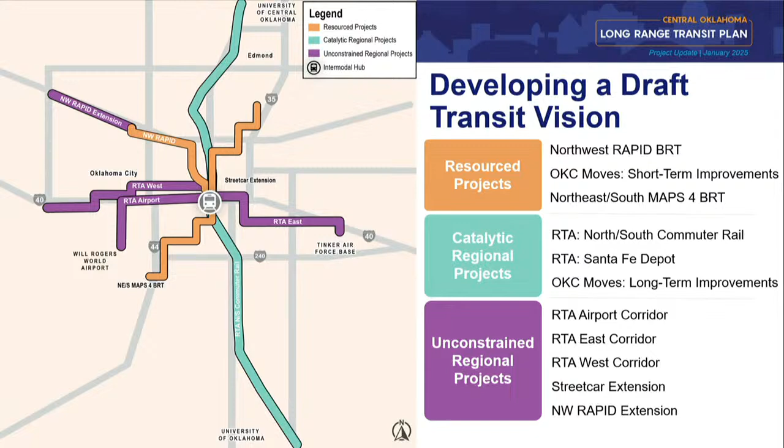Last but not least is what we're calling the unconstrained regional projects. These are projects more for the 30-year horizon: the RTA Airport Corridor, the RTA East Corridor and West Corridor, as well as potential streetcar extensions and even a Northwest Rapid extension. These are all projects that make up the vision of this plan.

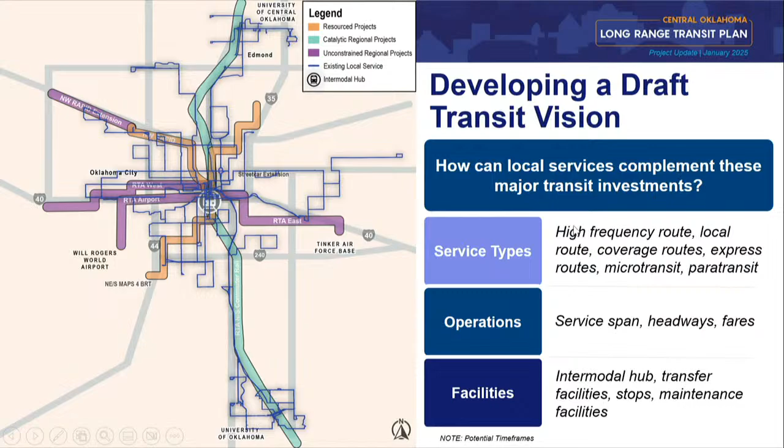Alongside that, local service will be a great opportunity to realign with these regional high-capacity corridors. We'll be looking at service type, operations, and what facilities could look like as part of this plan to recognize those regional connections that the vision corridors represent. So that'll be a significant focus as well on this long-range plan.

So just want to talk quickly about schedule. We started this planning process in August of last year. We've had a lot of stakeholder engagement with all the different communities and operators in the area. We'll be wrapping up the assess phase at the end of this month and rolling into the evaluate phase of the project. Throughout the project, we've had a lot of coordination with the RTA as well as the other operators I mentioned previously.

With all the great work being done, it's important to be coordinated throughout this process. Last but not least, the project website that'll be live later today is connectcentralok.com, and we'll have information there about the virtual town hall on January 30th from 11:30 to 1.

So with that, love to open up to any questions. Luke, thank you. Any questions? No? Okay. Appreciate the very comprehensive, high-level summary, but the comprehensive look at how you're approaching all of these projects. So thank you very much. Great. Appreciate it. Thank you.

Okay, moving on to item 2D, recommend approval of final plans and specifications to be advertised for bid for the MAPS 4 bike lanes Phase 1A, Northwest 16th and Northwest 19th Streets between Overholser Trail and Indiana. This is another piece of our bike lanes projects. Josh Malwick from Consor Engineering is here to go through what's included in this set of plans.

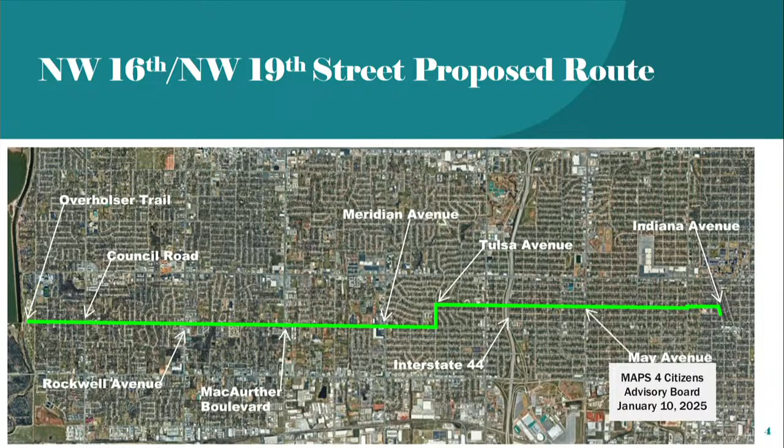This is just an overview of the proposed route. You can see where it starts there on the west end at Overholser. It makes a jog from 16th to 19th at Tulsa, and then it ends at Indiana. There's a little jog down Indiana that connects to the Watch For Me and the sales tax projects as well.

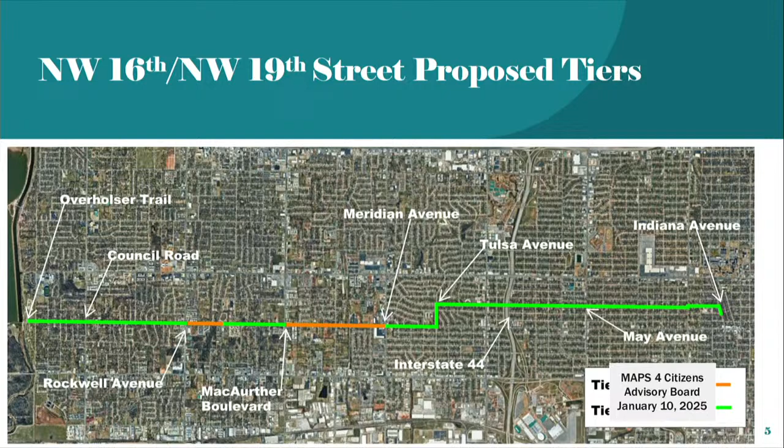We did have to make a little bit of a change to the tiers. This was proposed along Northwest 16th to be a Tier 3 facility. However, because of the available width, we had to make some adjustments, so we were able to throw some Tier 1 in there. I actually put some protected bike lanes using the armadillos—I'll show you what those are in a moment. So we got about a quarter of a mile at Rockwell, and then the full mile between MacArthur and Meridian, where we were able to get to Tier 1.

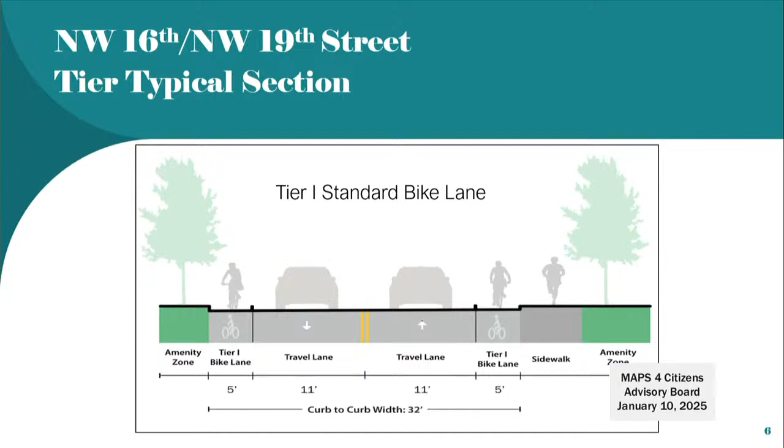Just as a reminder, we do need 32 feet for the Tier 1 standard bike lanes. That way we're able to get 11-foot driving lanes, which is about the smallest we can go with the driving lane, and then get the 5-foot bike lanes in there. The Tier 3 requires a 22-foot wide roadway, and then we center the Sharrow pavement marking along the best alignment—because we need the best alignment for where vehicles are driving along 19th Street, where there's a center median that divides traffic. We'll be putting that more towards the median side, centering it there because it's 18 feet wide versus just 11 feet wide.

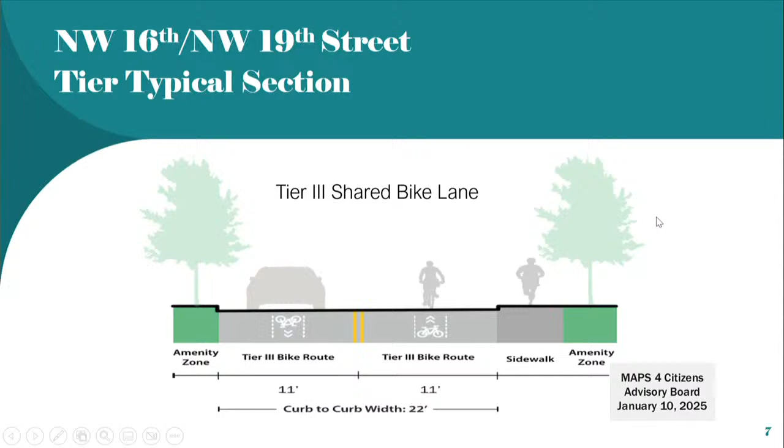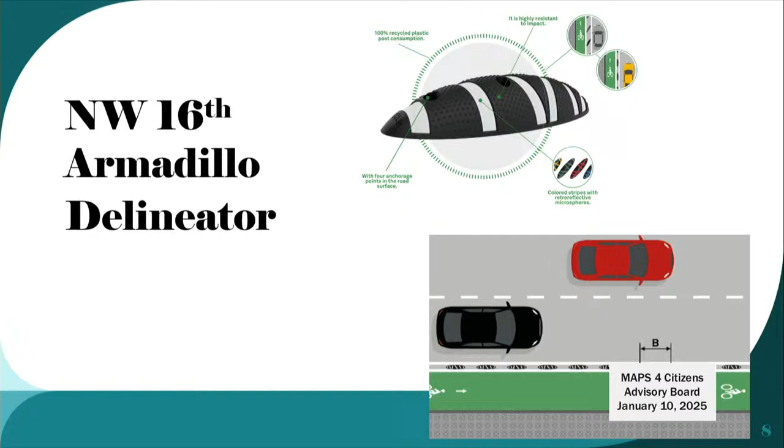So this is the armadillo that we'll be using. It's mounted to the pavement. You can see in that bottom picture, this is more along the lines of what we'll be installing because it will just be a single line—it won't actually have a buffer there. When we have this application in a buffer, we're able to actually put it in on a 45-degree skew along the buffer.

So the 16th and 19th Street improvements, we were able to add 377 sharrows, roughly a mile and a half of Tier 1 bike lanes. We will be doing pavement repairs along the routes to make sure that what we're putting down on the pavement is adequate and that the route surface is as best as possible for cyclists traveling along it.

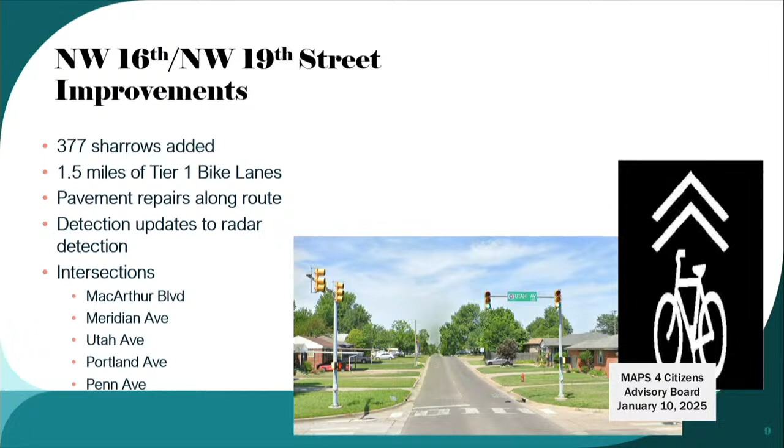We are signalizing the May Avenue and 19th Street intersection. This was approved by Traffic Commission, I think in 2021. They wanted to actually add left turn lanes, but because of the available space and the amount of right-of-way and homes that we would end up having to take to put left turn lanes in, we're just going to add signals to this intersection.

We're also updating the pedestrian infrastructure, so all current ramps will meet ADA. We're going to add the crossing there at the median on the east side, which is the bottom side of the image there. All new push buttons and pedestrian signal equipment as well.

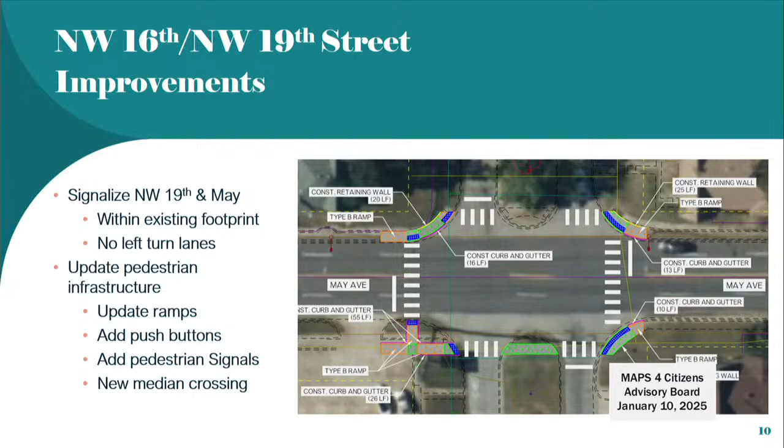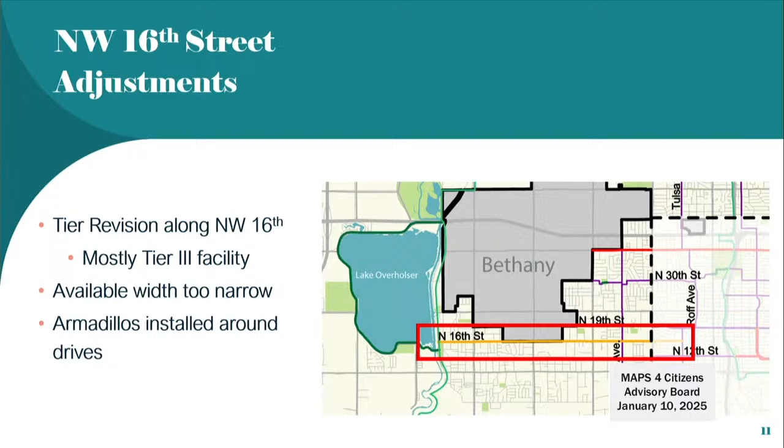Like I had said, we did have to make some adjustments to the tiers as presented in the current bike walk. It does show to be a Tier 2, but because of that space, we had to change it to Tier 3. The available width was just too narrow, but we are going to be able to install those armadillos at the bike lanes to provide a little bit more visibility and protection.

So the schedule will be to go to council next week, and then we'll immediately turn around and go to bid, hopefully awarding it in March, and then wrapping up construction likely in late fall.

As far as budget goes, we had $3.4 million for the project with the construction cost estimate just under 2.4, so we'll have a surplus budget of a little over $1 million.

The public information website's been quite successful. As of yesterday, we had 724 hits to the site with about 255 downloads of the documents that we put on the site to provide information as to what the bike lanes, what each one of these projects is.

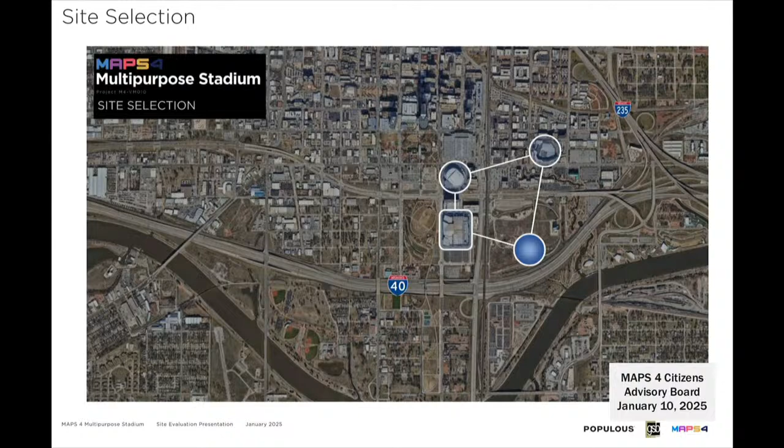This is a view of the parcel outlined here, the actual 9 acres that were donated. As you can see, there's a bit of orientation to these 9 acres as part of the development and master planning, with the goal to hopefully have a stadium with some views facing certain directions towards the city.

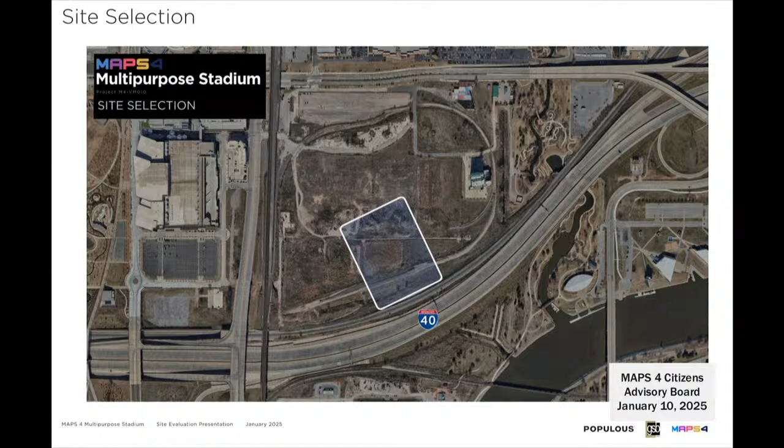Here's a very conceptual master plan thought of what could be around here. None of this is set in stone or developed any further than what you see today, but it's looking at how this overall district could be laid out. To be clear, our portion of work is just the stadium - everything else around it is private development and part of a larger master plan approach. But this is where we're looking to fit it.

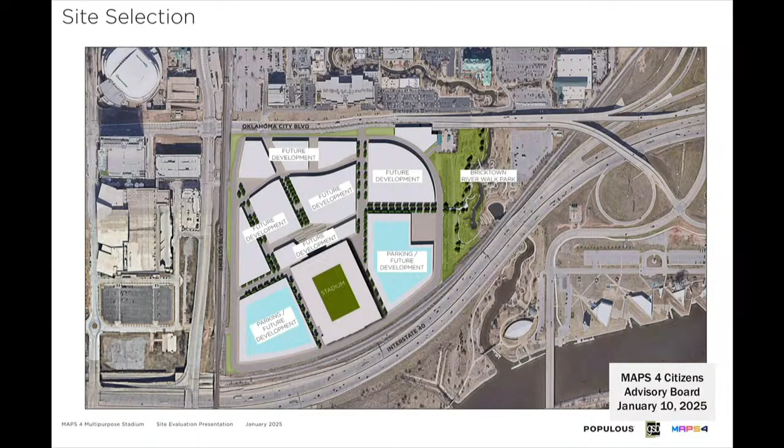As we zoomed in on this boundary line, this kind of rectangular shape, the goal was to test fit this size with current MLS stadium sizes and requirements. There's plenty of space there to do that, which is really the goal of this task, and we can confirm that we can fit it. Some of the other amenities people have been asking about, parking and other facilities around it, that's yet to be determined. We'll come back with that information as we get farther into the design phase, but right now we just needed to test that the stadium can sit here.

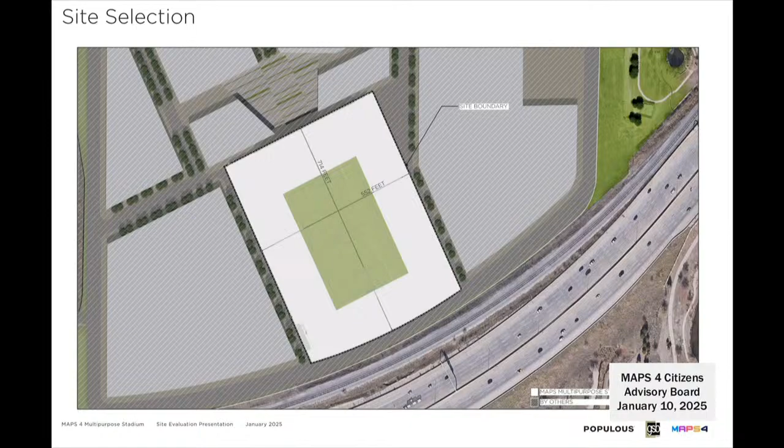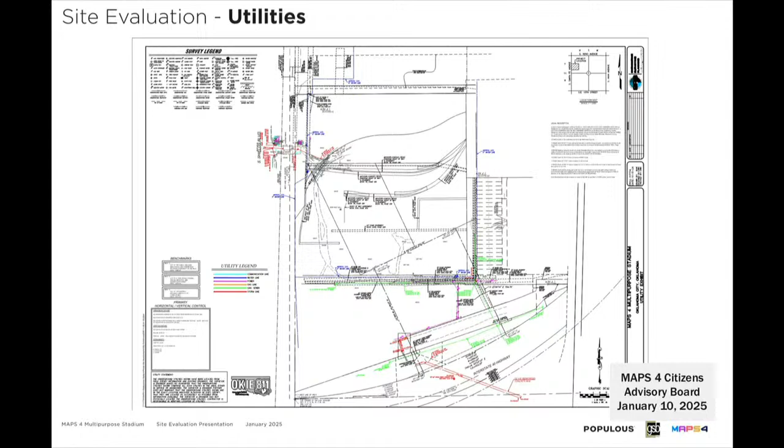Part of the site evaluation process was to look at those existing 9 acres and understand what's within that space, so we had a full site survey done. As many of you know, that's the old co-op land area that was removed and demolished, so it's mostly just a big open field area right now. There are a few different landowners, but as far as this parcel goes, there's not a lot going on in that space today. There's very little change in elevation and topography, which is good - it's mostly a flat site, so there won't be a lot of earth demolition needed for the new stadium. There are also very few utilities on this site today.

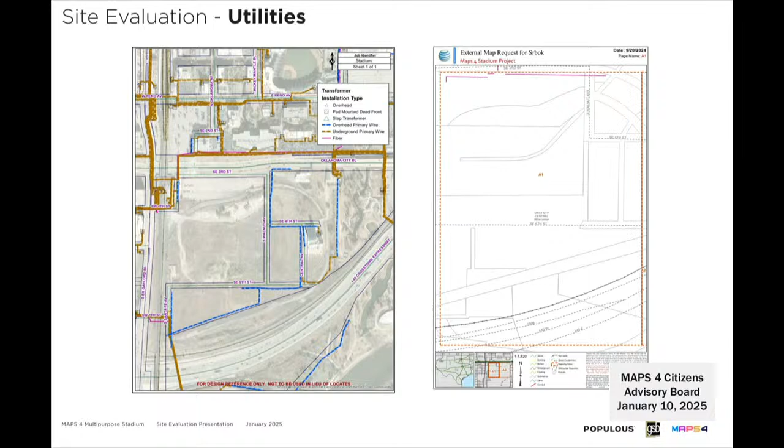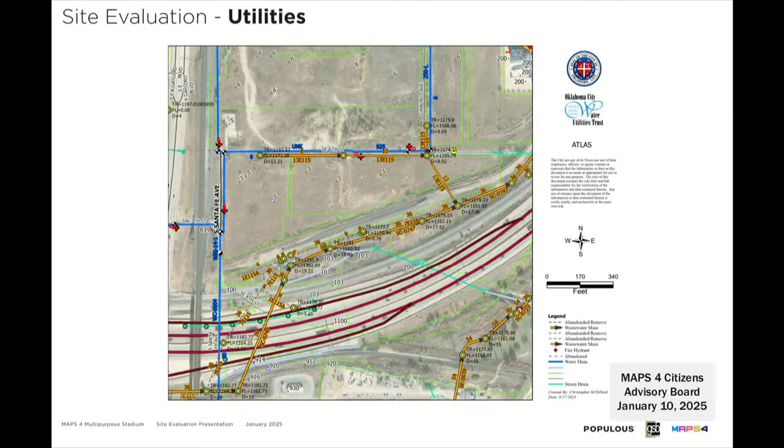So a couple of quick next steps - after this, things really get fun and exciting for us. We'll jump into the preliminary report phase, which is 180 days long. Just to be clear, this is just the first phase, the 53 million construction budget. This is when we start to work on design and develop design studies. One of the first things we're looking to start next month is some visioning sessions with stakeholders, to make sure we're hearing what everyone really wants this stadium to be, and what they feel is important for it to be successful for the community and the team. Then we'll start working on a 3D model and drawings, and hopefully have some renderings to show in the coming months, which will lead to the design report and an initial cost estimate.

I think that's my last slide. So any questions up to this point? Any questions for Kevin? Yes, Chelsea.

Very excited, also love soccer. Are there any specific stadiums or recent developments you're looking at as examples for how to build this out, that I could do some due diligence on myself? Coming from Kansas City, the newest stadium there is the new women's stadium that was built in Kansas City, and that's one we've looked at and toured. But Populous has done a handful of other USL stadiums that don't get as much recognition, along with the quite a few MLS stadiums we've done. So we have a good range of experience, and we've been talking to the city, and we'll talk to the stakeholders next month about things they've seen at other facilities and maybe ones they'd like us to learn more about so we can compare. Obviously we have a limited budget we'll have to be mindful of, but there are some good examples out there.

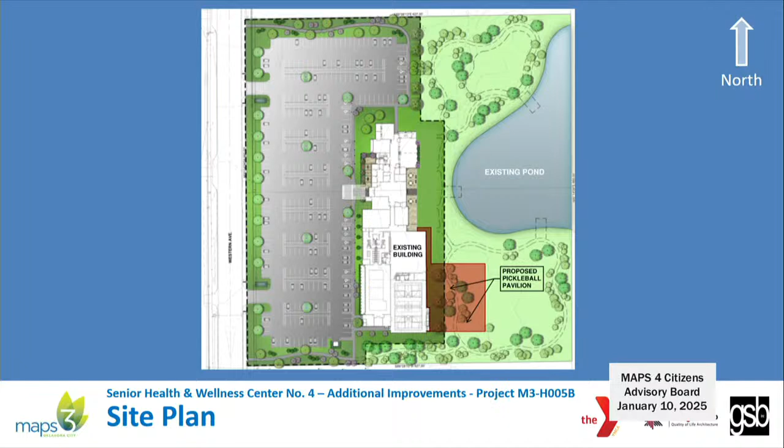Good morning, everyone. Just to bring you up to speed on this project, we're adding on to the existing building at 134th and Western, operated by the YMCA, which is doing incredibly well for them. Our project right now is focused on the southeast corner of the building to bring 4 outdoor pickleball courts and fencing, lights and shades—if those can be absorbed into the alternate budget—and paving to get you in and around the building.

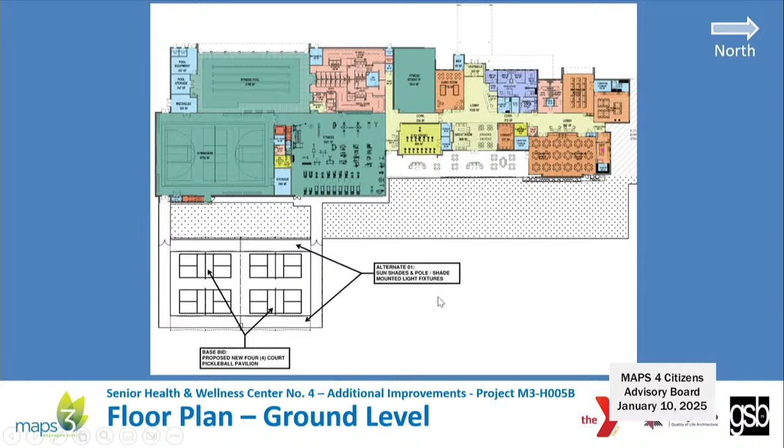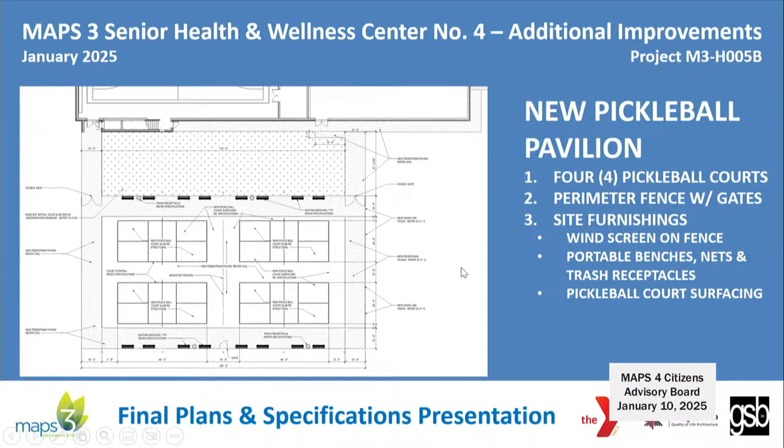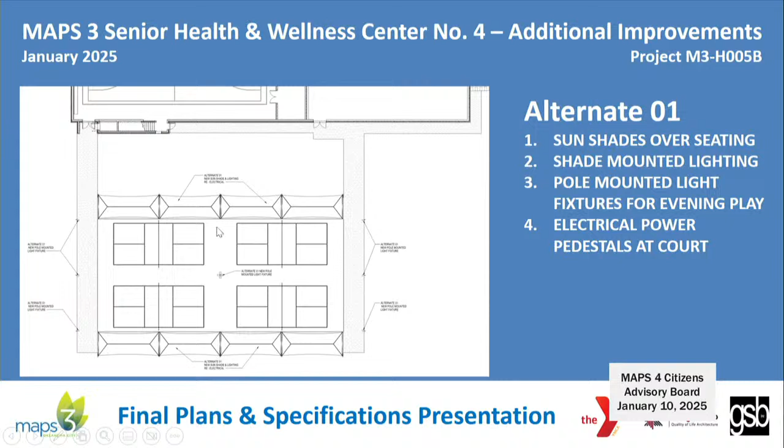We have 4 courts back to back with a fence in the center to keep people from backing into each other, benches and trash receptacles, and as part of the alternate, there are sunshades and light poles to allow people to play pickleball as late as they feel. There will be lights along the north and south edges, one in the center, and then under the sunshades as well.

We're estimating right at $544,000 for the base bid, hopefully it comes in better, and another $300,000 for the enhancements to the sunshades, light fixtures, and bringing electricity from the building to the site. Our construction budget is $550,000, so we're $5,800 under budget. We anticipate having a pre-bid later this month, going to bid in February, getting started in March, and wrapping up in July.

I'll send it to you. Any questions? Yes? No, Jessica? No? Okay, all right, fantastic. Thank you so much, thank you.

So with that, we need a motion and a second to approve the plan. Please cast your votes. Motion passes. Thank you. So moving on to item 3, discussion items.